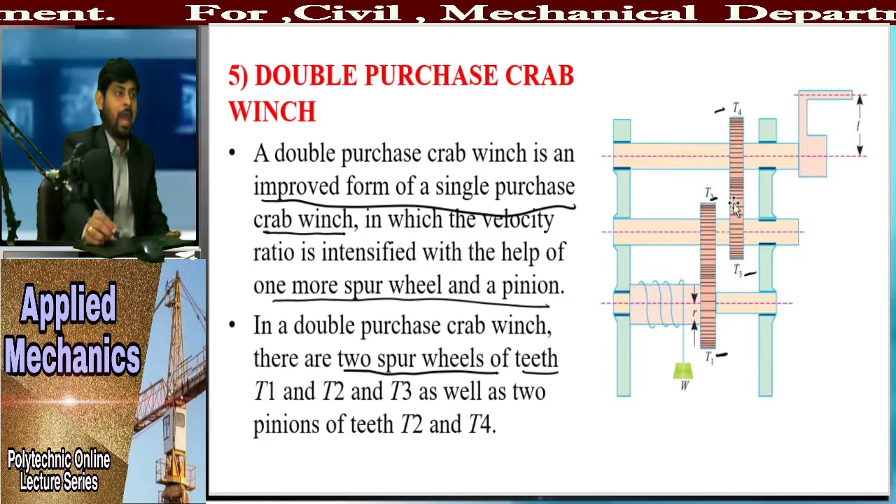In a double purchase crab winch there are 2 spur wheels of teeth T1 and T3, and 2 pinions of teeth T2 and T4. So you can see here we have 2 spur wheels. T1 means this is T1, and T2, T3 as well as T4. The arrangement of spur wheels and pinions is such that the spur wheel with T1 gears with the pinion of teeth T2. So here T1 is your spur wheel gear, but T2 is the pinion. Similarly, T3 is the spur wheel and T4 is the pinion.

So from here to here this is your spur wheel, that is T1, and this connects to the pinion T2. This is your second gear, the pinion gear. Which gear is large in size? That is our spur wheel, and the small one is the pinion. So T1 is greater than T2. T2 is your pinion and T1 is the spur gear. As well, this T3 from here to this clutch is your spur wheel, and T4 is your pinion, which is attached to T3.

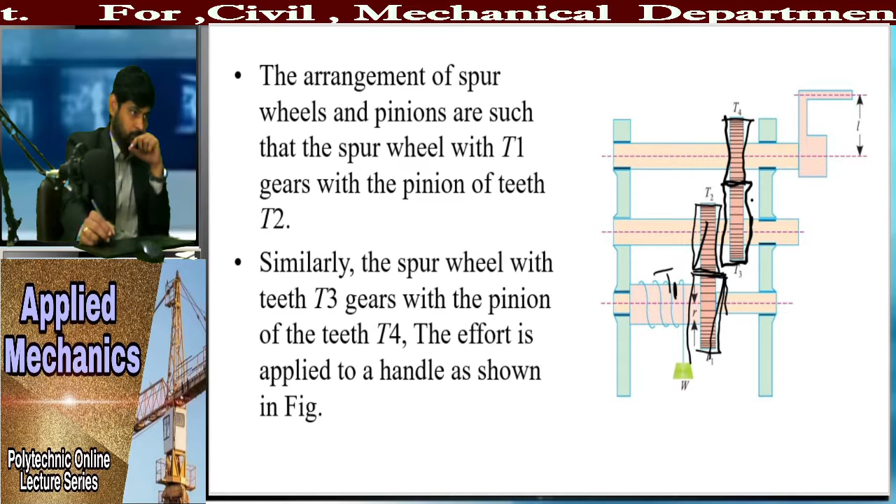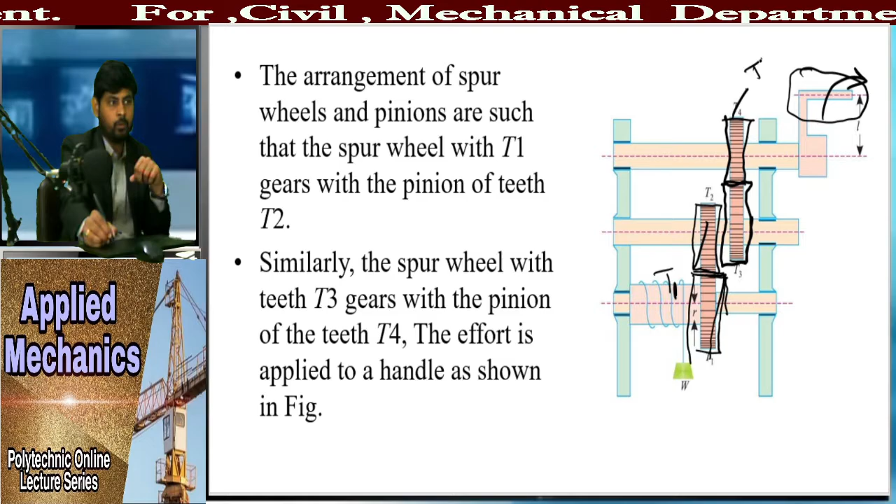So now you can see here T3 gears with the pinion T4. The effort is applied to the handle as shown in the figure. This is the handle, and we apply the effort here to rotate it. When we rotate this handle, T4 will rotate. T4 is mounted on the shaft with T3, so T3 also rotates. When T3 rotates, T2 is automatically rotated, and T2 is mounted on the shaft with T1. That's why T1 also rotates. When T1 rotates, the weight is lifted upward. Okay.

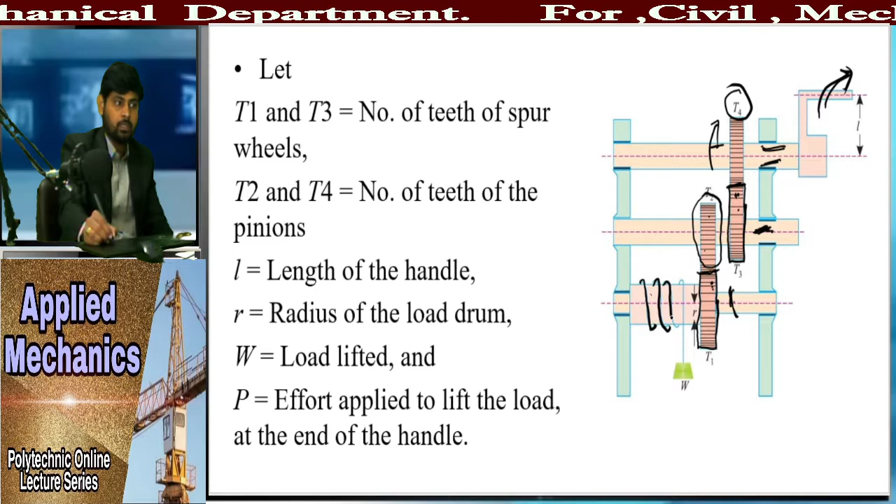Double purchase crab winch. So now see all the notations of double purchase crab winch, which are useful to solve the problems based on this. Now see here, let T1 and T3, this is the T1 and this is the T3. So these are nothing but the number of teeth of spur wheels. So this T1 and T3 is nothing but the number of teeth of spur wheels. So how many number of teeth on this spur wheel? That is nothing but the T1 and T3.

Now you can see here, number of teeth of spur wheels. After that, T2 and T4 are nothing but the number of teeth of pinion. So how many teeth on the pinion wheel? That is nothing but the T2 and T4. Now see here, L is nothing but the length of the handle. So from this shaft, how much is the length of this handle? That is nothing but the L.

Now R is nothing but the radius of the load drum. So here we have a drum. On that drum we have mounted a string, and that string is attached to the load on one end, right? So this much is the radius of this load drum. Or you can say this total is nothing but the diameter, so half of this diameter is nothing but the radius.

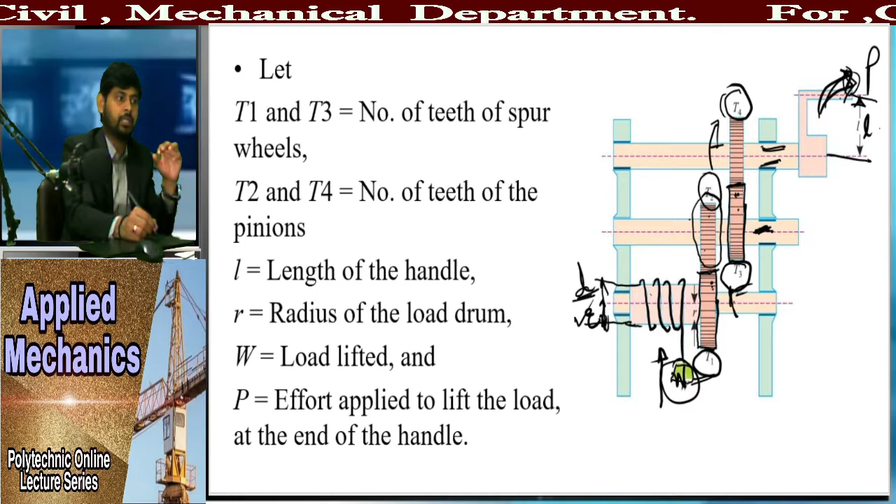After that, W is nothing but the load lifted, and P is equal to effort applied to lift the load at the end of the handle. So here at this end, what effort we have applied, that is nothing but the P. So these are the terms which are used in a double purchase crab winch. Now see the relation of this double purchase crab winch, which we use to solve the problems based on it.

So you can see here, we know the distance moved by effort in one revolution of the handle. One revolution of handle means we are rotating this handle one time. So how much distance will be covered due to that effort? That is nothing but 2 pi L, the total circumference, where L is the distance. So this is your equation number 1.

After that you can see here, the number of revolutions made by the pinion 4. So here by the pinion 4, the number of revolutions is nothing but one revolution.

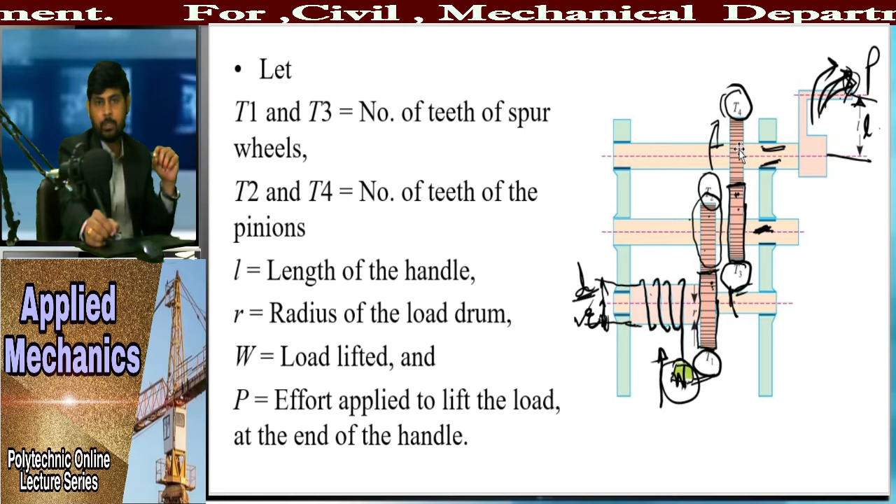Now you can see here the number of revolutions made by the wheel 3. So here you can see how many revolutions occur with wheel 3. T3 is based on T4, right. So T4 divided by T3 is nothing but your number of revolutions of the wheel.

After that, the number of revolutions made by the pinion 2. Pinion 2 is also mounted on the same shaft. See here, wheel T3 and pinion T2 are both mounted on the same shaft. So what revolution we get for wheel 3 is similar for pinion 2, because both these gears are mounted on the same shaft. So that is nothing but T4 by T3, which is similar to the wheel 3.

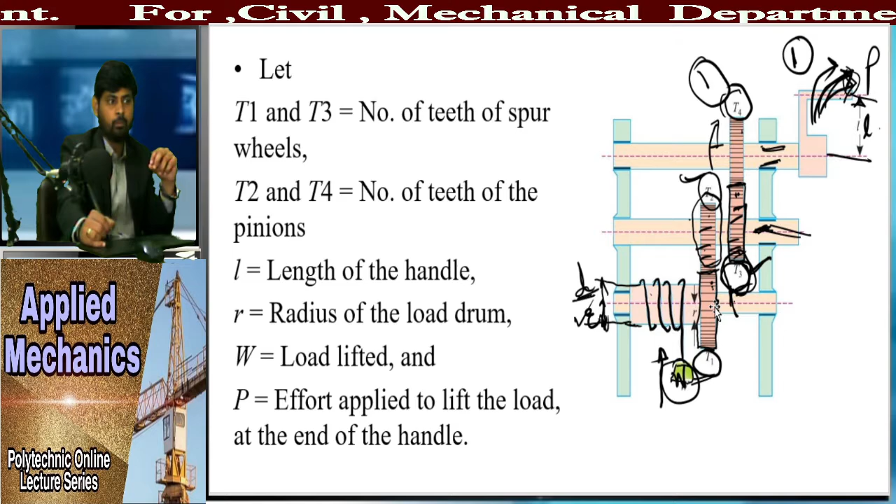Now, the number of revolutions made by the wheel 1. For wheel 3 we get these two. Now for wheel 1 we have to take these two, and also these two. Why? Because we are applying the effort here. So these two into these two, that is nothing but T4 divided by T3 into T2 divided by T1, that is T2 divided by T1 multiplied by T4 divided by T3.

Therefore the distance moved by the load is nothing but 2 pi r multiplied by T2 by T1 multiplied by T4 by T3. So give this equation number 2.

Now we know very well what the formula for velocity ratio is, which we always take: distance moved by effort divided by distance moved by the load. So here distance moved by effort and here distance moved by load.

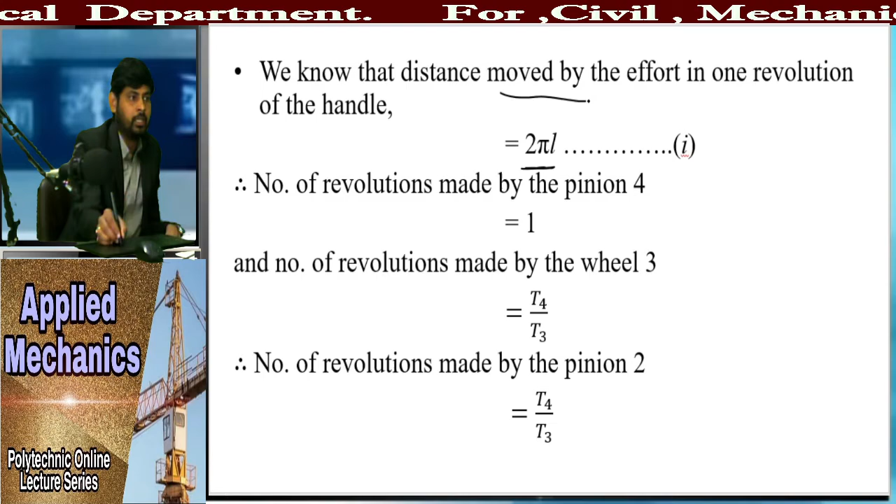In equation number 1, we have calculated the distance moved by the effort, that is 2 pi L. Now the distance moved by the load is, from our equation, 2 pi r into T2 by T1 into T4 by T3.

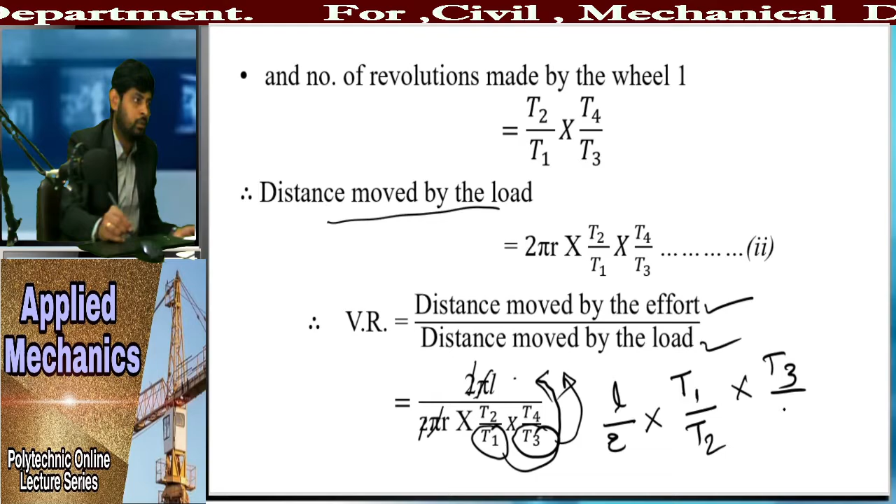Now these two pi will get cancelled. So you get the equation L by r multiplied by T2, which is in the denominator so it shifts to the numerator, giving T1 by T2. Similarly T4 is in the denominator, so it shifts to the numerator giving T3 by T4. So the new equation is L by R multiplied by T1 by T2 multiplied by T3 by T4. This is nothing but the velocity ratio for the double purchase crab winch.

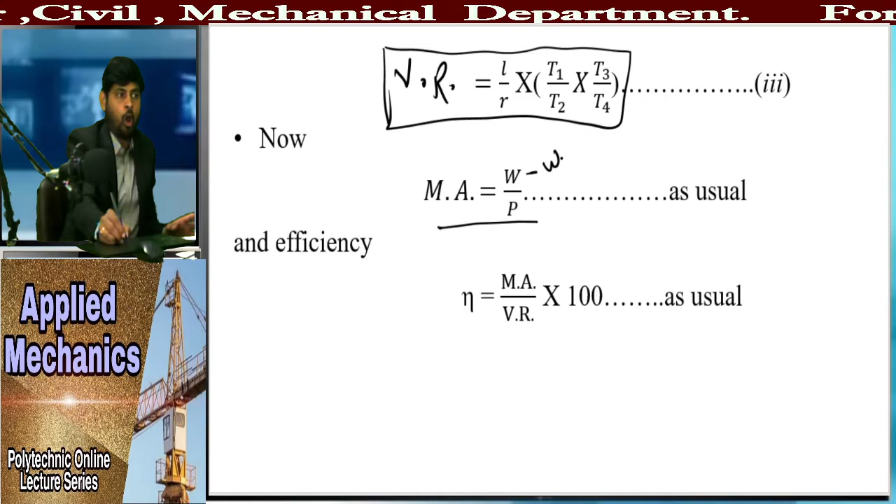So this is what we have to find out. Now mechanical advantage, as usual, is the weight or load divided by the effort. And similarly, efficiency is mechanical advantage by velocity ratio into 100, as usual.

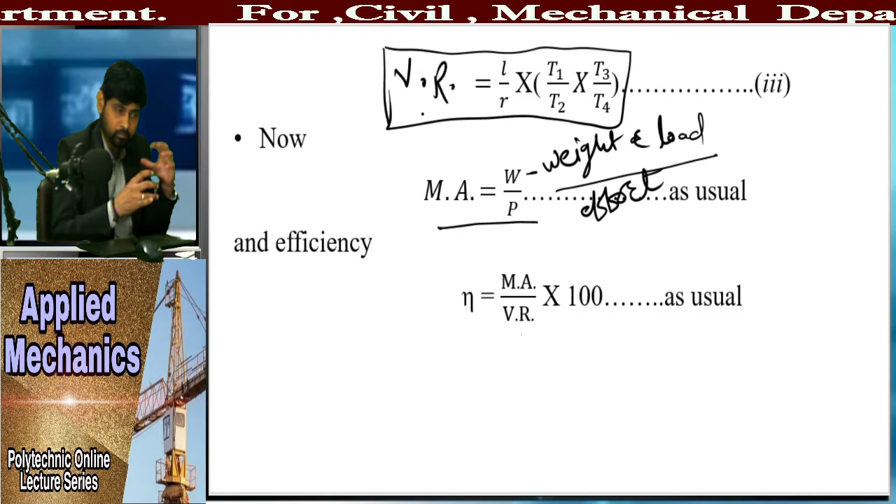So in MCQs they can ask a question like: what is the velocity ratio of single purchase crab winch? And they will give you all the velocity ratios, for differential, for single crab, for double purchase crab winch, and for differential. So four options are given to you, and you have to select the appropriate option as the answer.

When you are not able to select the appropriate answer, meaning you don't remember the formula of velocity ratio for a particular machine, your answer will be wrong. If they are asking for the single purchase crab winch and you select the answer for the double purchase crab winch formula, your answer will be wrong. That's why you have to remember the velocity ratio equations for the different machines.

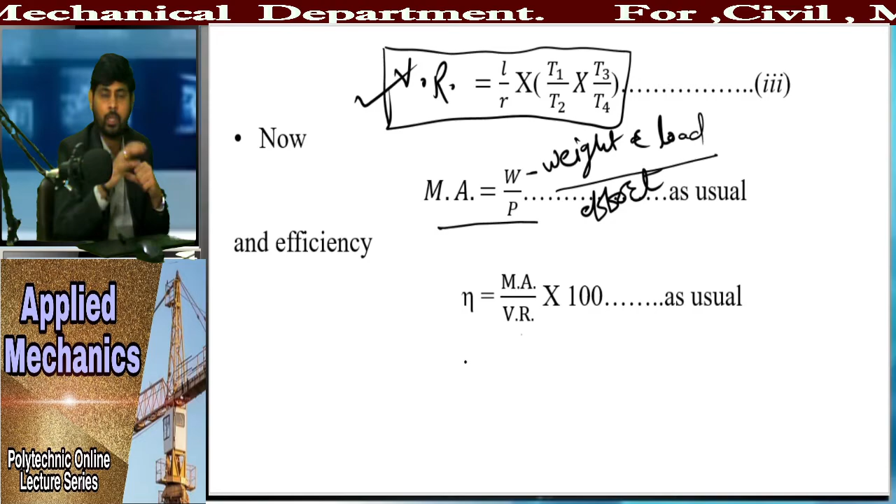Before going to sleep you have to read that formula at least once, and after waking up in the morning, just when you wake up, you have to read that again once. If you keep doing this daily, you will remember those formulas for your lifetime, meaning you will never forget them. So that will be helpful to you in your interviews also.

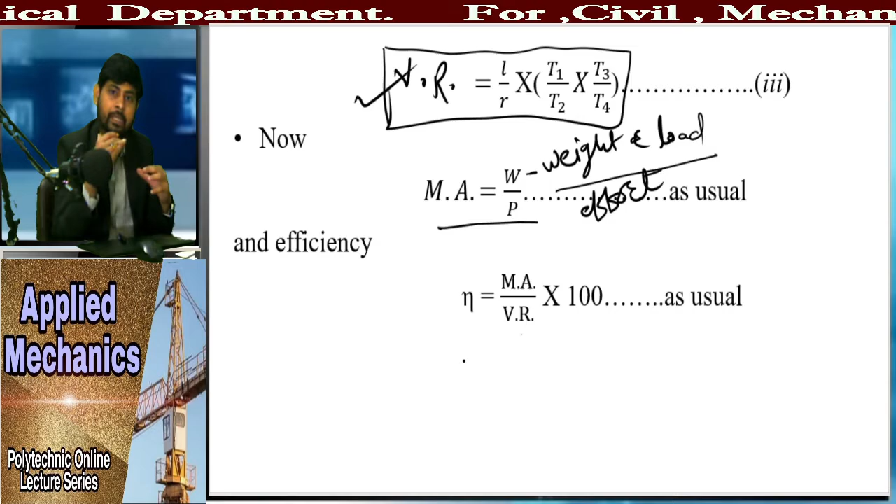As I always told you, this subject is the most difficult subject in this semester, and it is also foundational for mechanical and civil students. Once you understand the concept of mechanics, you will easily solve the problems in strength of material, theory of machine, machine design, and after that theory of structure or design of structure. So these subjects will be much easier for you.

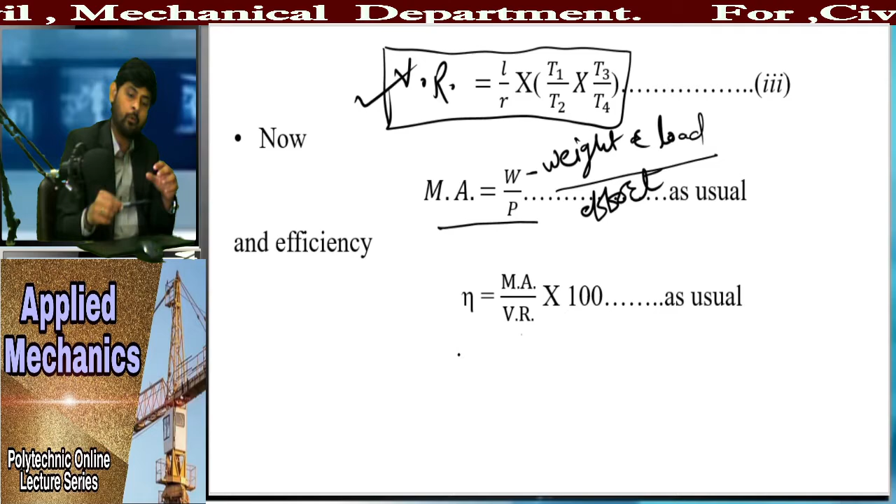That's why you should know the basic knowledge of applied mechanics. Like for mechanics, you should have a basic knowledge of applied mathematics and physics also.

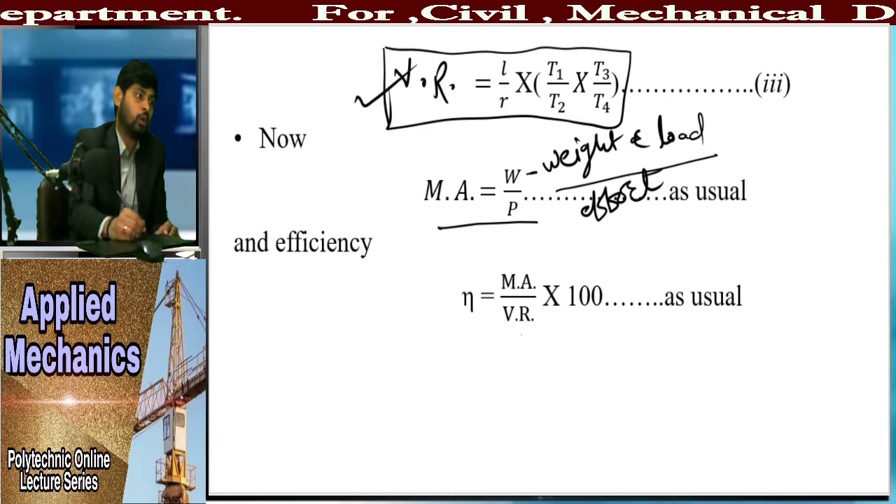So now, once we have seen the double purchase crab winch derivation, we get the formula for velocity ratio here. Now we have to find out the problems and solve a problem based on it. So just see here example number 10, based on our sequence 1 2 3 4 5 6 machines, which is based on the double purchase crab winch. As I always told you, read the problem carefully. So what it says is, in double purchase crab winch.

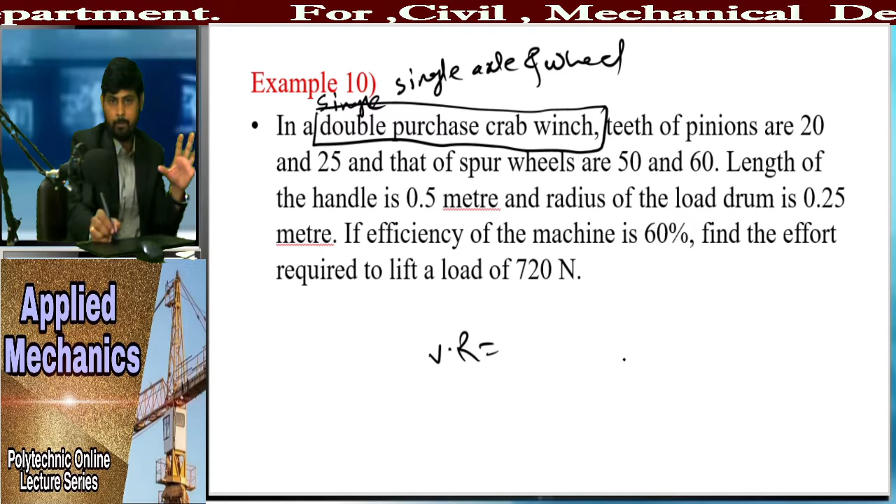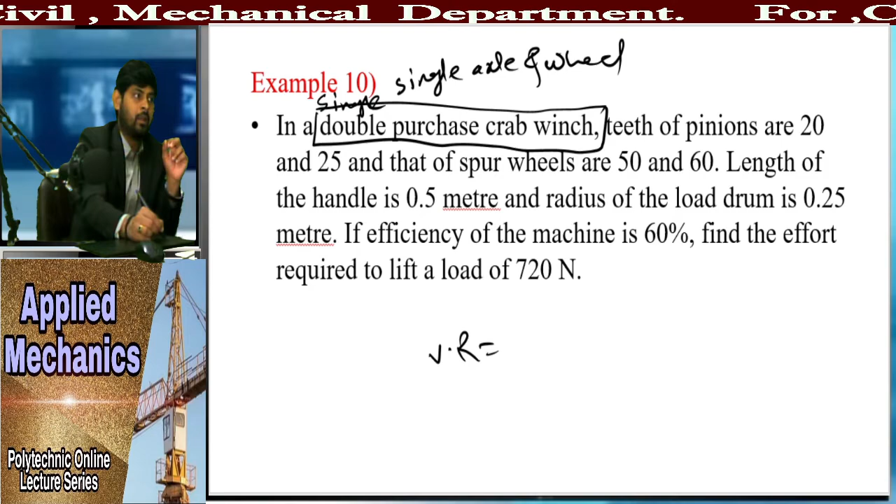So you have to practice well, you'll have to practice very well for this. That's why I told you to prepare one notebook for the formulas.

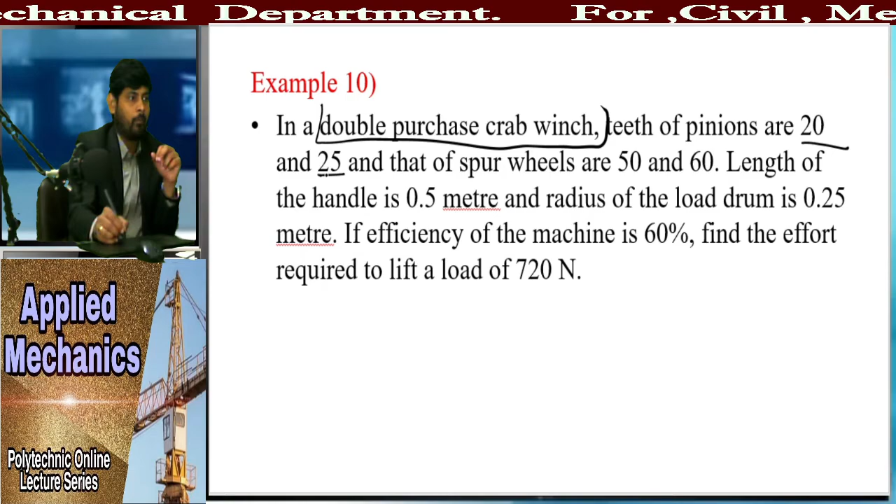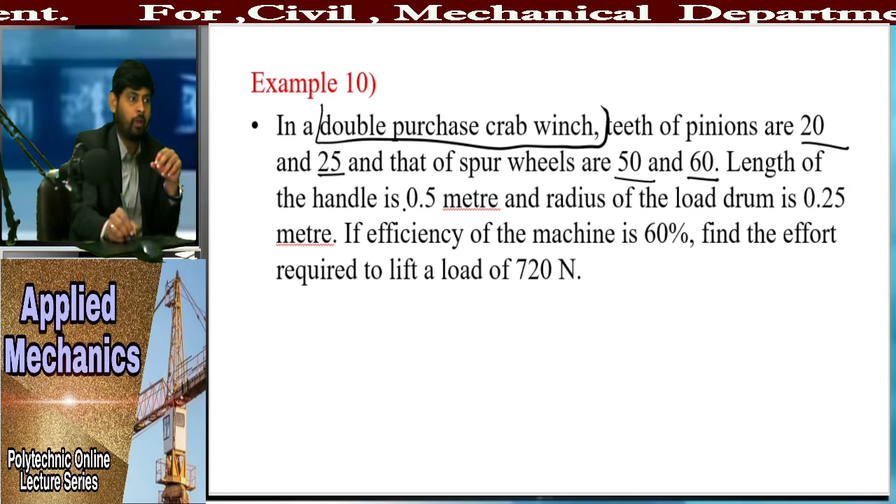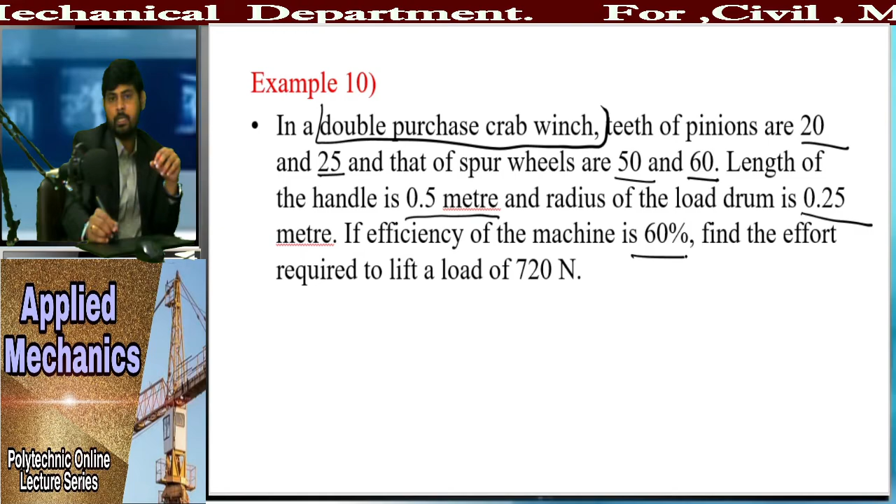Now see here what our problem says. In a double purchase crab winch, teeth of pinions are 20 and 25, and that of the spur wheels are 50 and 60. We know the value of T1, T2, T3 and T4. Length of handle is given as 0.5 meter, and radius of load drum is also given as 0.25 meter. Now, if the efficiency of machine is given as 60%, find the effort required to lift the load. Load is given as 720, and effort is what is asked.

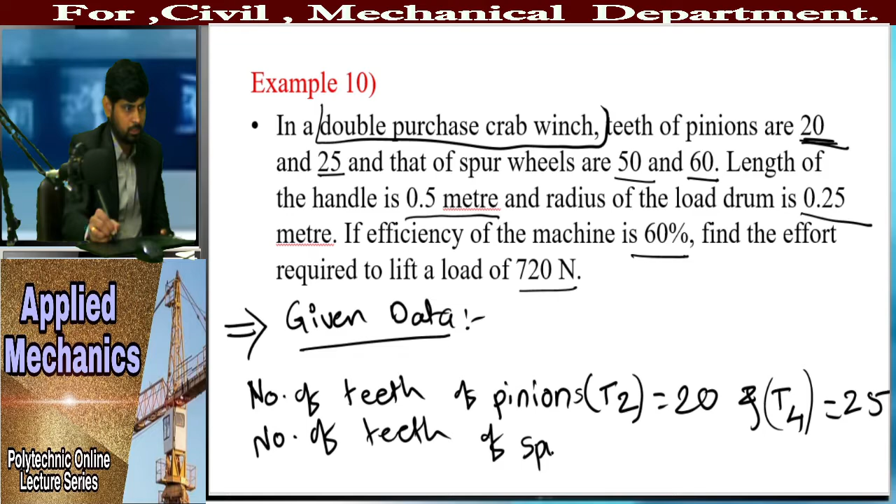Now see, that of the spur wheels means number of teeth of spur wheels. So here T1 is equal to 50 and T3 is equal to 60.

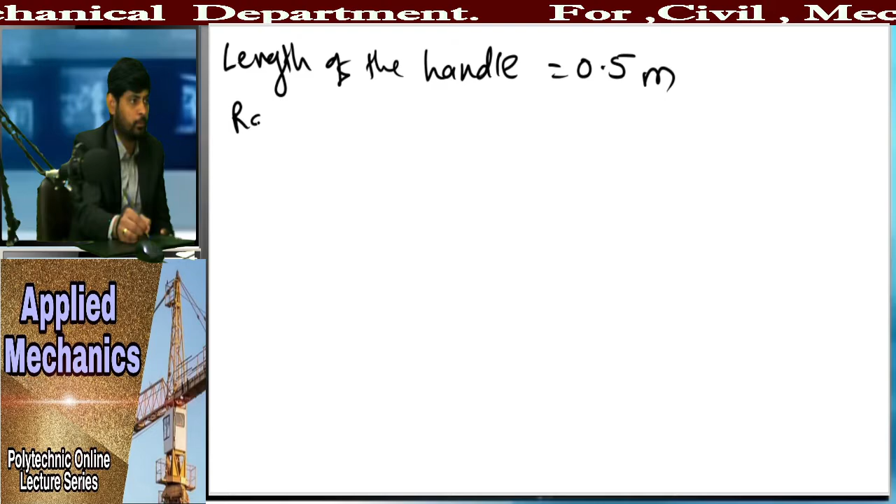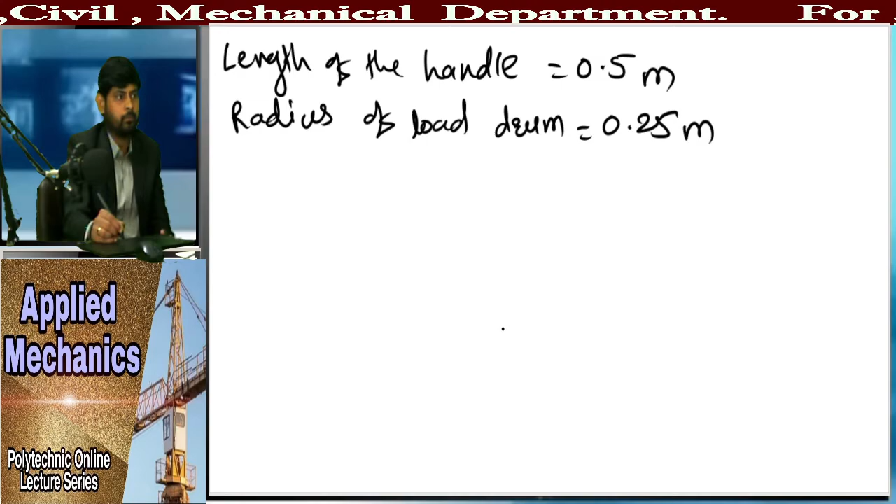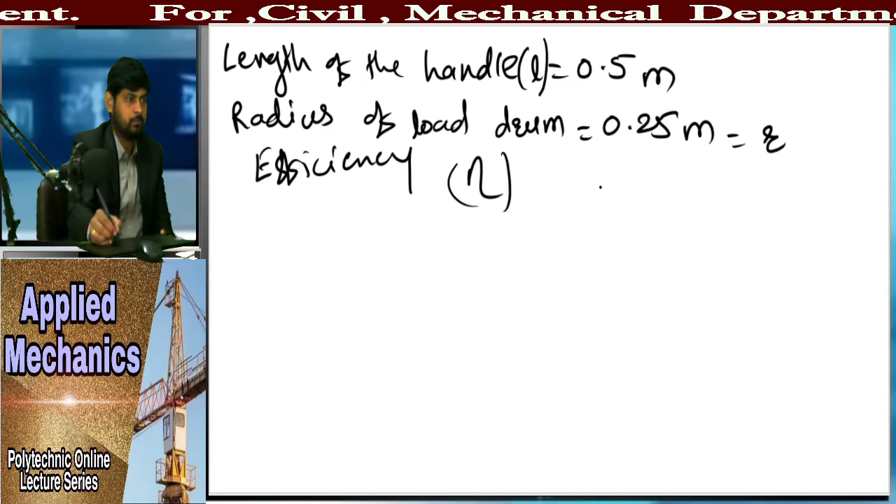Now see what we have given, efficiency. Efficiency is also given to us. Radius of load drum we have notated as small r and this is nothing but L. Efficiency is given to us, that is 60%. So write down here, efficiency is 60%.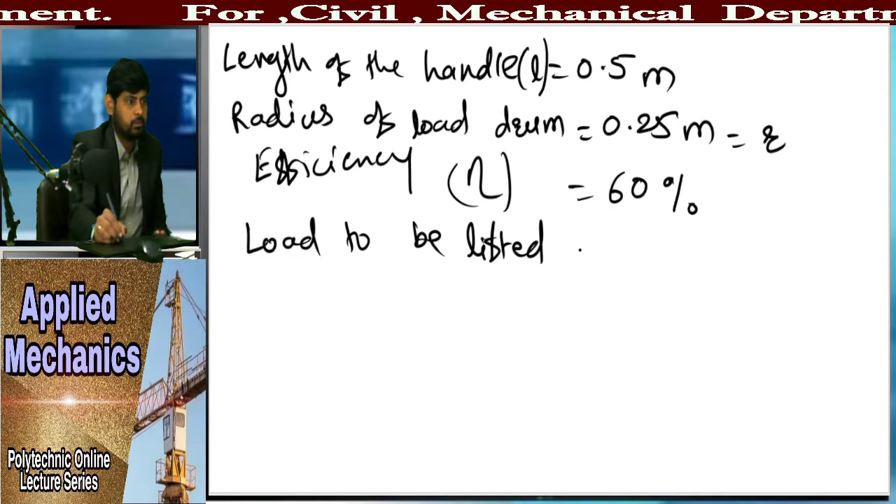After that what is given, we have given the load to be lifted, that is nothing but W, how much, it is 720 Newton, right. So this is all the given data, and what do they ask us, they ask effort required to lift load, that is nothing but P. How much, P is how much?

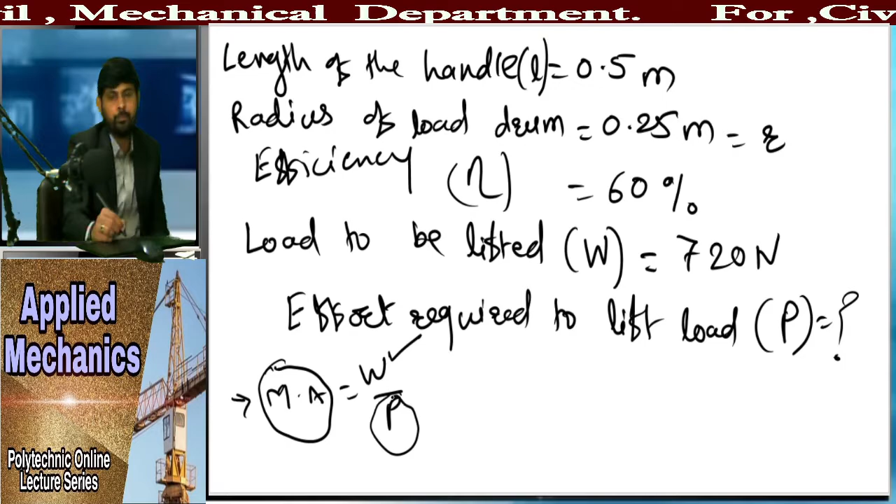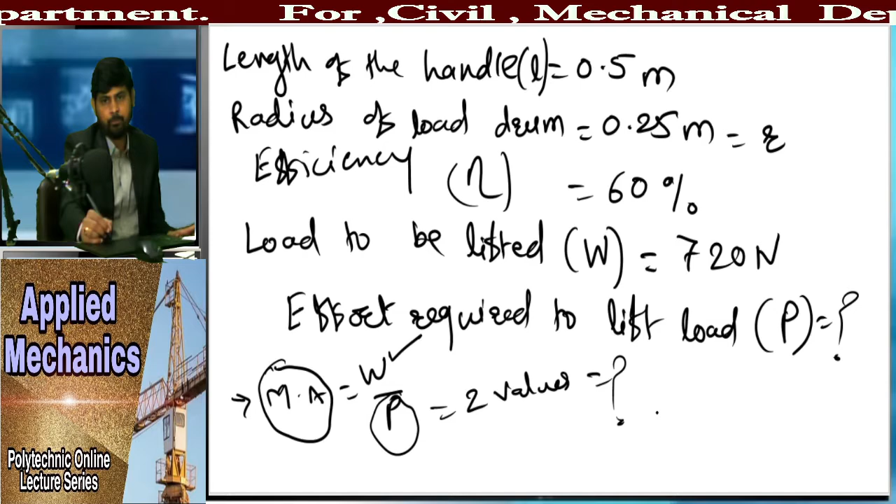But now you can see here, we don't know the value of mechanical advantage. We know the value of load, but we don't know the value of effort also. So here two values are unknown. So where two values are unknown, can we find out from there? Obviously not, right.

So one thing is not usable to us. Now, it is usable to us, but let's see when. Second thing, how we can find out. Now then we can find out by using this equation. Which equation?

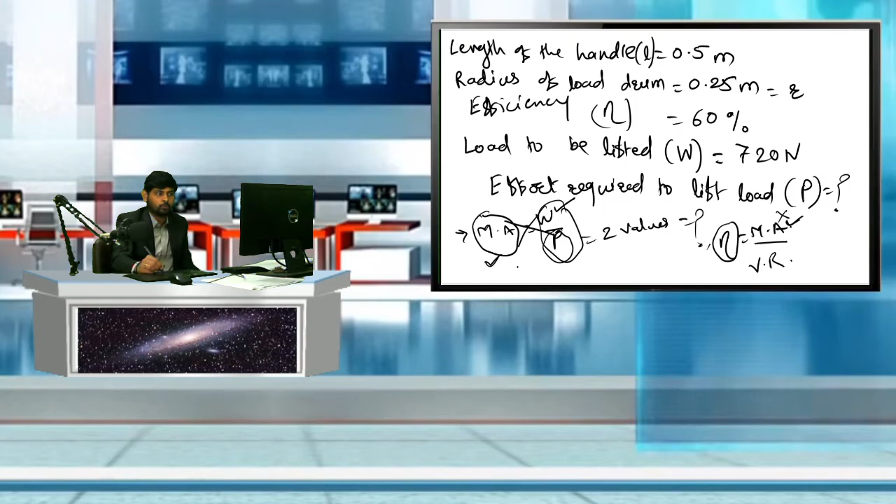Efficiency is equal to mechanical advantage divided by velocity ratio. We know efficiency, but not mechanical advantage directly - though we can find it using a formula. We also know the formula for velocity ratio, which we recently covered for the double purchase crab winch.

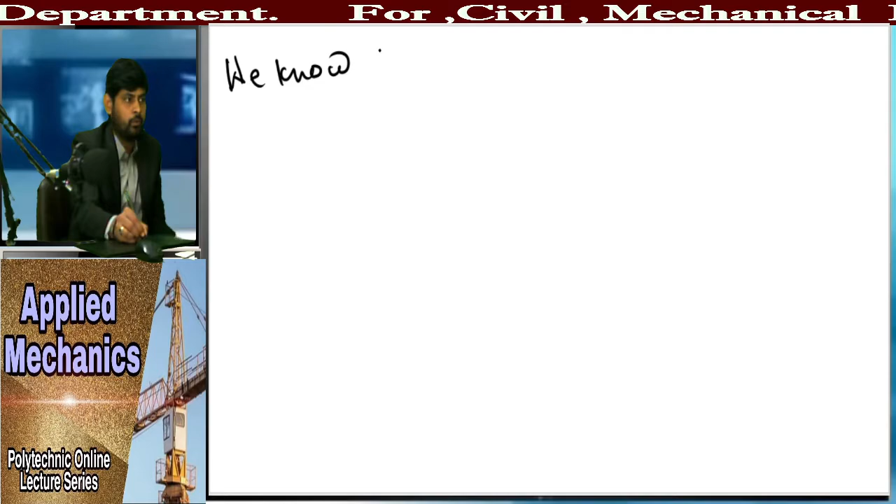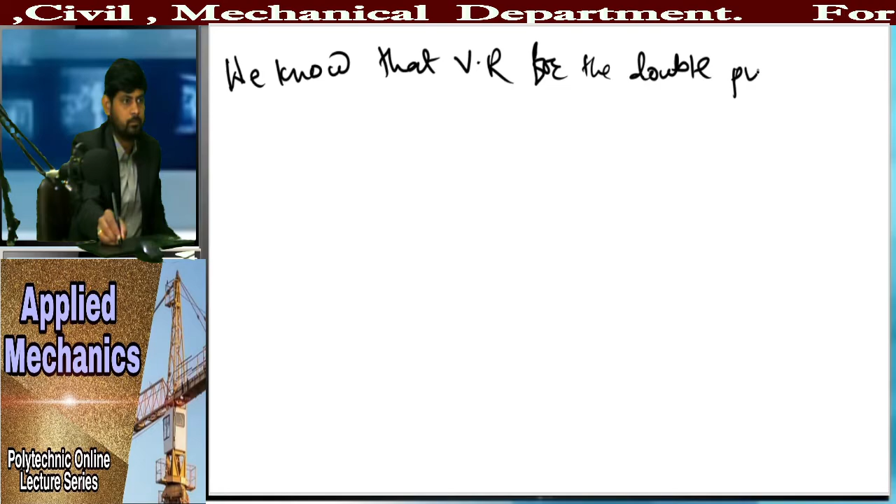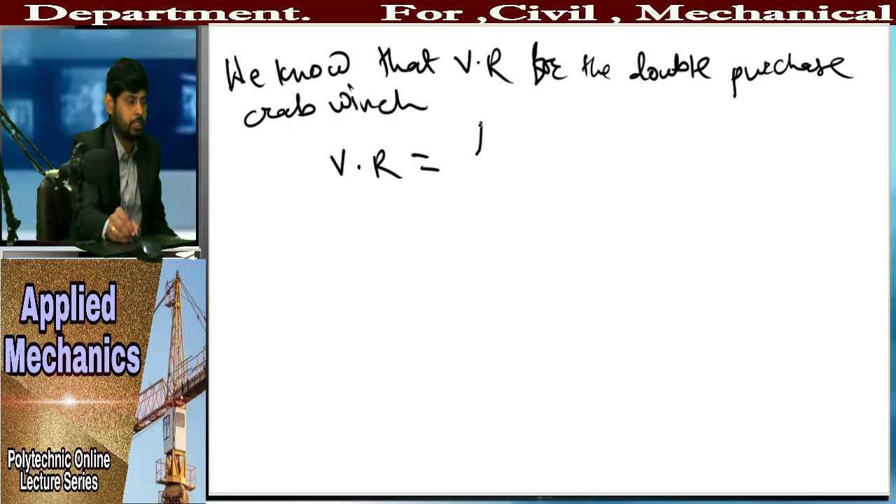The first thing we have to do is find out the velocity ratio. We know that velocity ratio for the double purchase crab winch is nothing but L by R into T1 by T2 into T3 by T4. So this is the formula for velocity ratio.

Now we know the value of L, R, T1, T3, T2, T4. So put these values and find out the velocity ratio. The value of L is 0.5, R is 0.25, multiplied by value of T1 which is 50 divided by T2 which is 20, into value of T3 which is 60 and value of T4 which is 25.

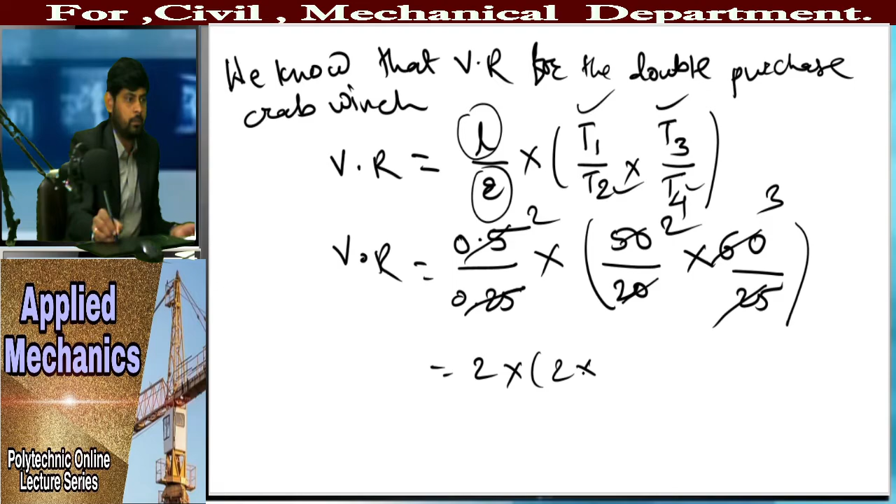Here T3 is 60 and T4 is 25... okay, and 0.25, 2 are right. So here you will get 2 multiplied by 2 multiplied by 3. So 3 twos are 6, and 6 multiplied by 2 is 12. So this is your velocity ratio - velocity ratio is equal to 12.

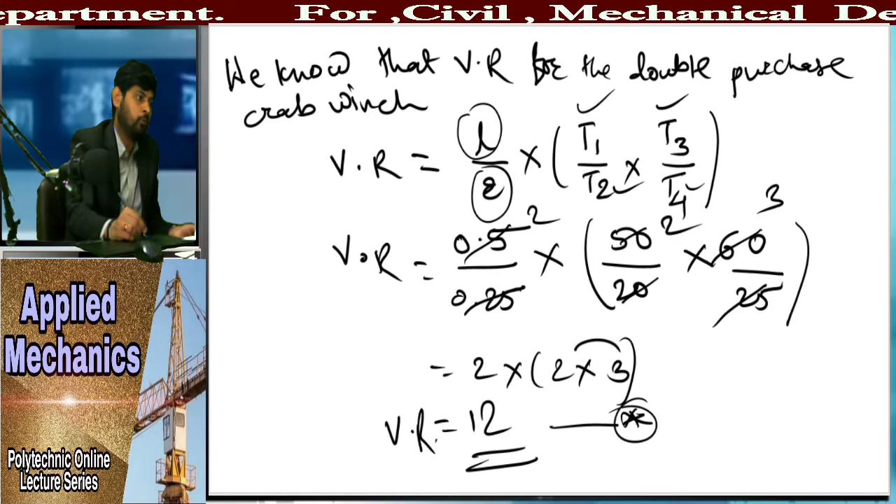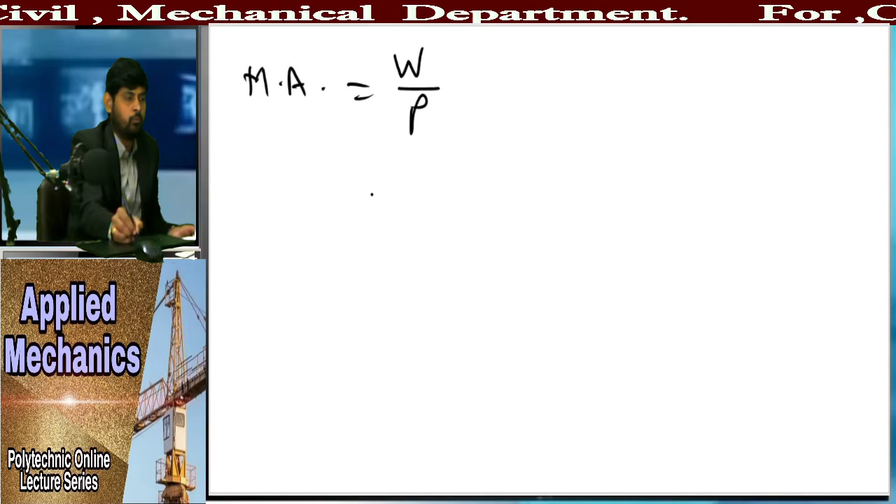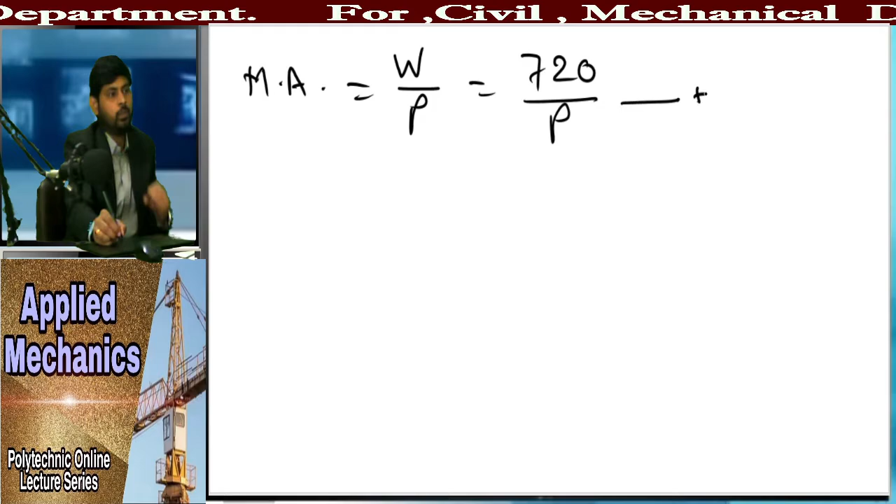Once you get the value of velocity ratio, the second thing you have to do is find out the mechanical advantage. The formula for mechanical advantage is W upon P. So value of W is 720 divided by P. This is the second term we have to find out.

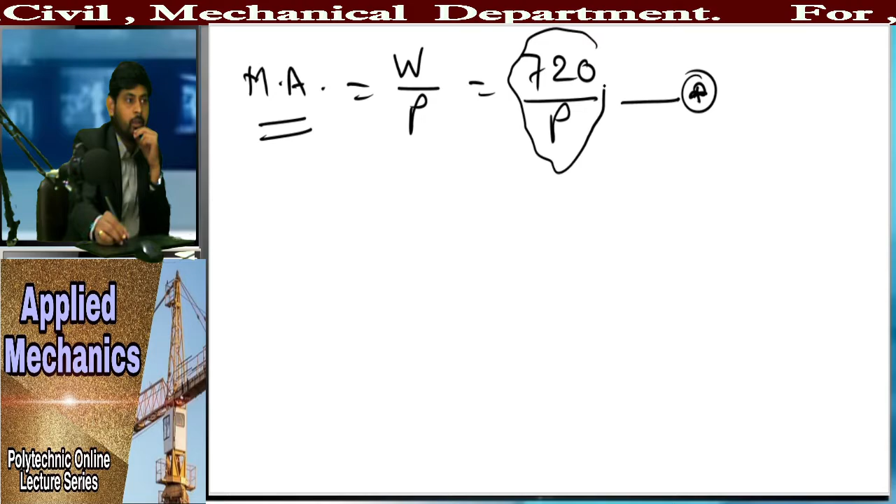So now we get the value of mechanical advantage in terms of this equation. Now, we know the efficiency. So what is the formula for efficiency? That is nothing but mechanical advantage divided by velocity ratio into 100.

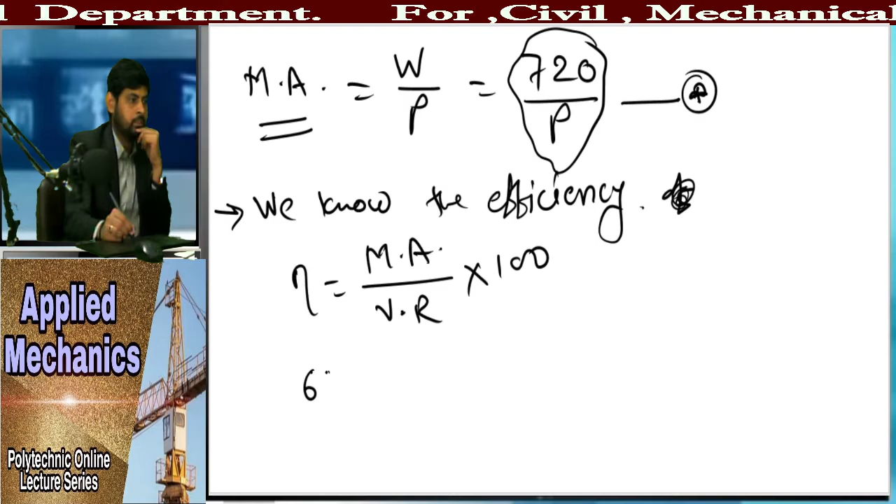Efficiency is given to us as 60%, equal to mechanical advantage. We get this equation. So put that value here: 720 divided by P, divided by velocity ratio, which we found to be 12, multiplied by 100.

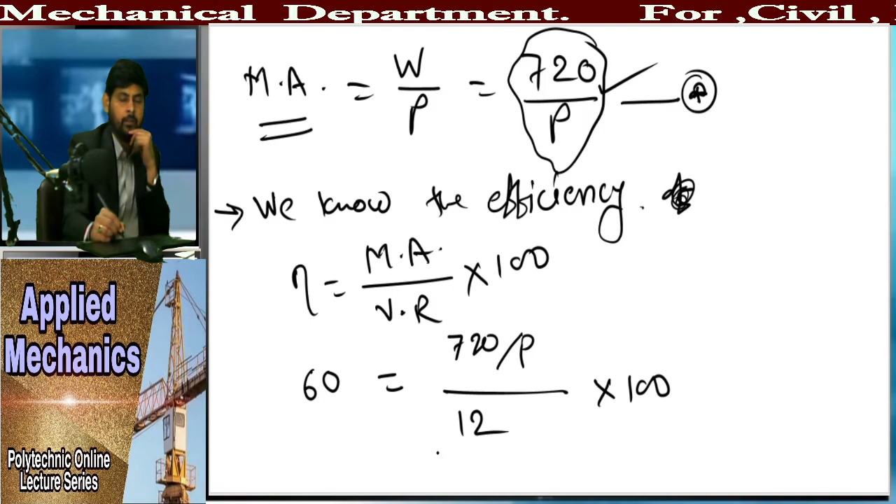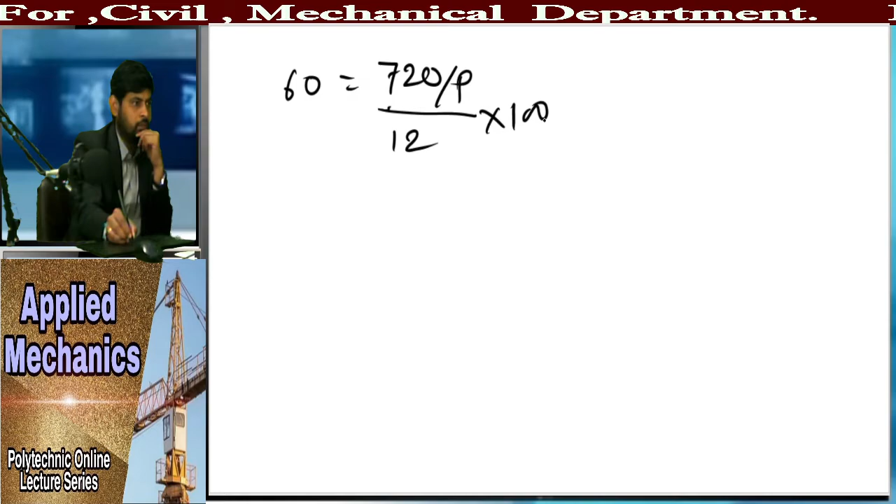So now do this calculation. Here you can see 60 is equal to 720 divided by P divided by 12 into 100. Now this 100 we can shift here, it will go in the denominator. So 60 divided by 100 is equal to, this P is already in the denominator, so we can shift here, that is 720 divided by 12P.

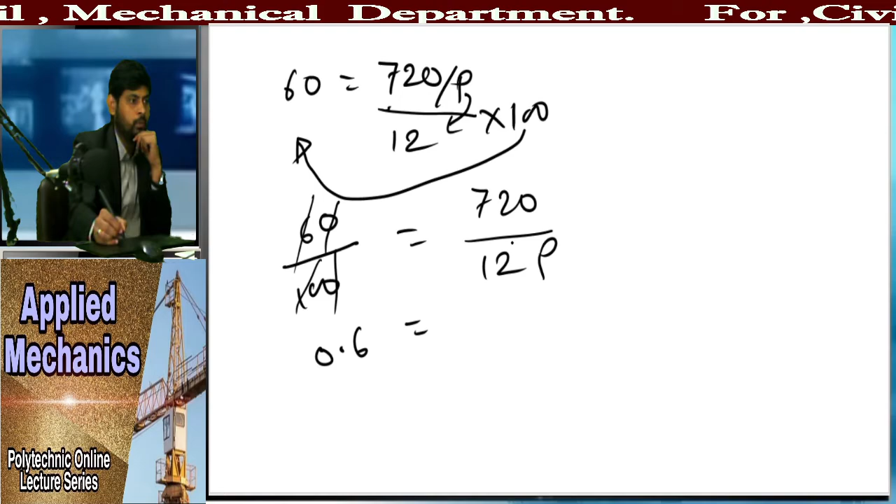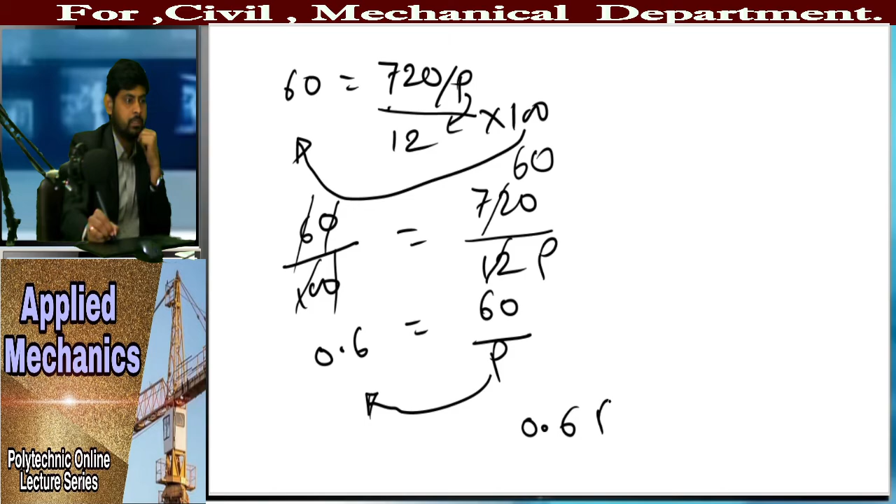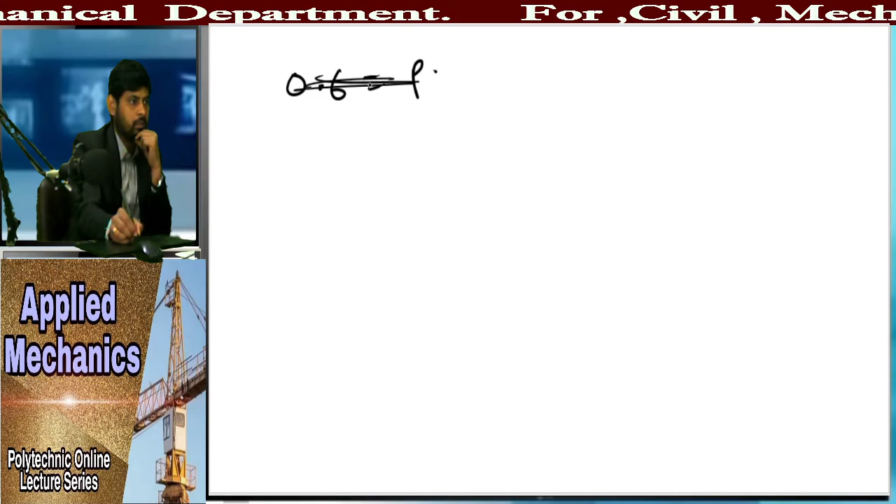So the zeros get cancelled, and 6 by 10 means it is 0.6 equal to - here 12 sixes are 72, and this zero as it is, so this value will be 60 divided by P. Now this P will shift towards the left side, so you get the equation: 0.6P is equal to 60.

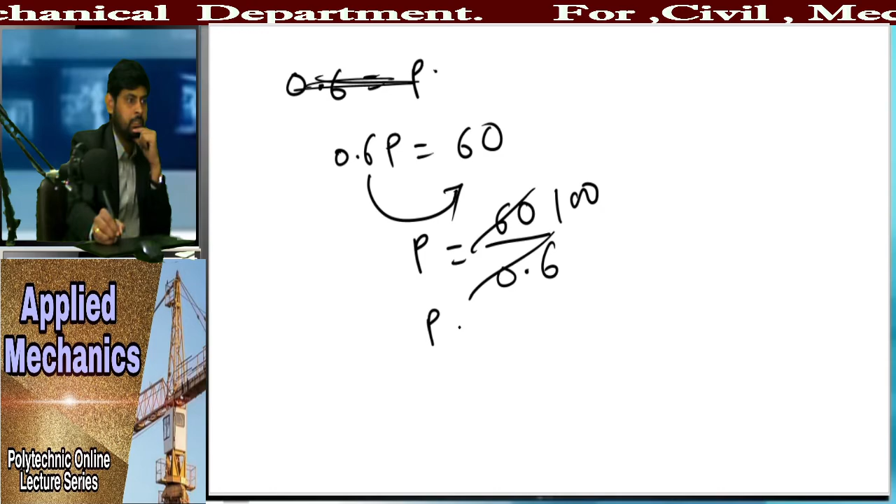Now this 0.6 shifts towards the right side, so you can write the equation like this: P is equal to 60 divided by 0.6. Do the calculation in your calc sheet, then it will be 100. So you get the value of P is equal to 100 Newton.

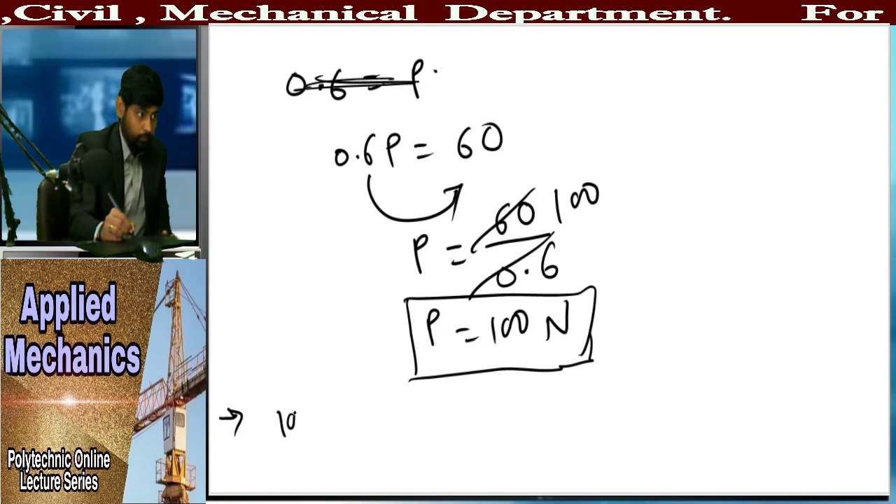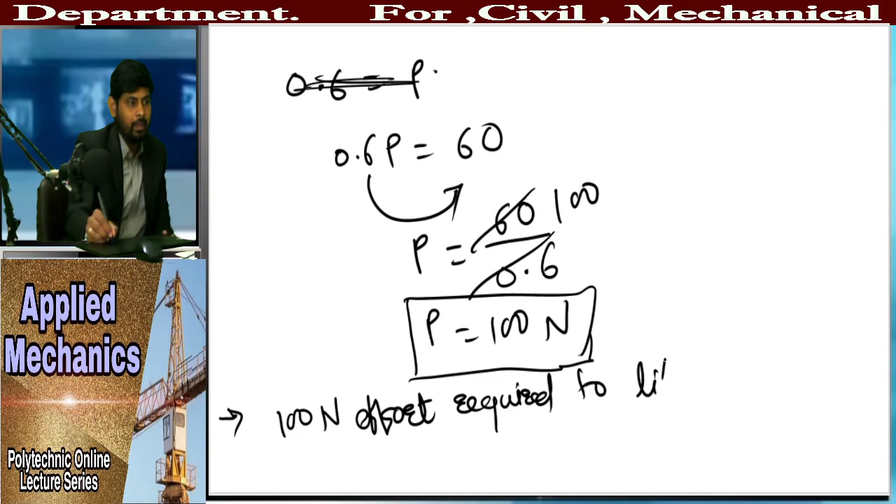So what was asked in our problem? They are asking us about the effort, so we get this effort. So you can write here: 100 Newton effort required to lift the load of 720 Newton, which was given. So this is your answer.

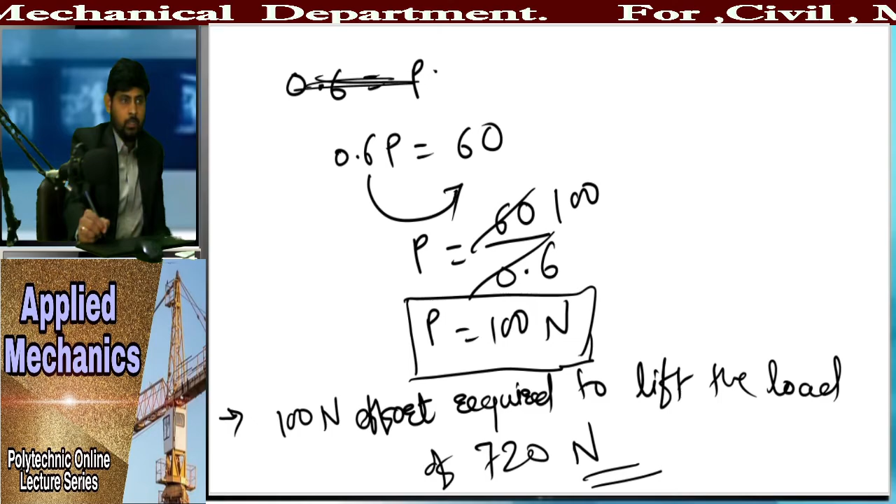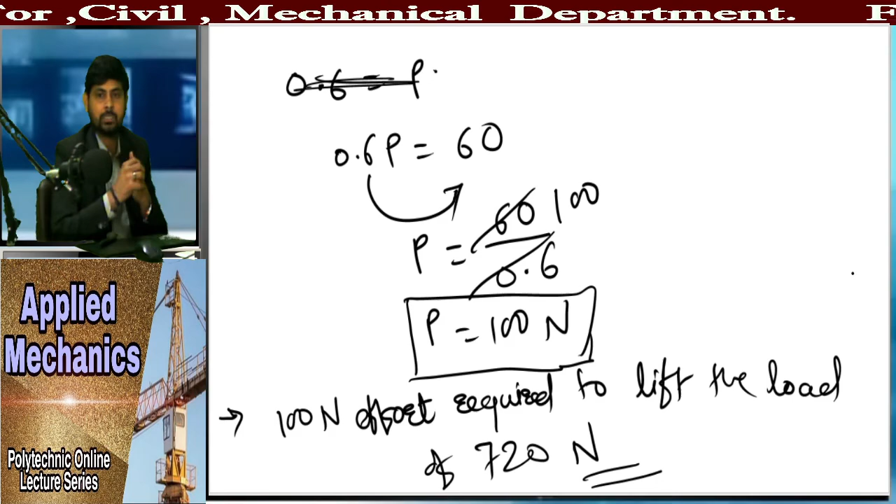So like this you can solve your problem. In today's lecture we discussed the double purchase crab winch and one problem based on it. One small difference between single purchase and double purchase crab winch: in single purchase we have only one spur wheel and one pinion, meaning T1 and T2. But in double purchase we have two pinions and two spur wheels, meaning T1, T2, T3 and T4, four terms.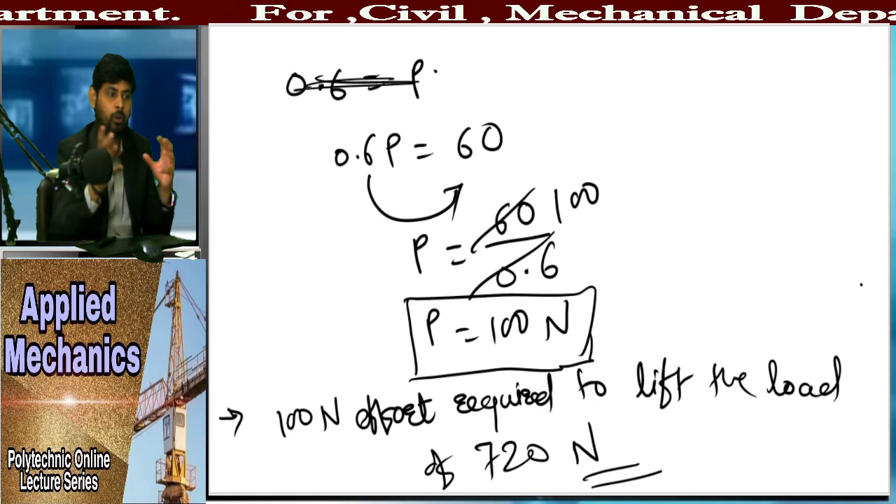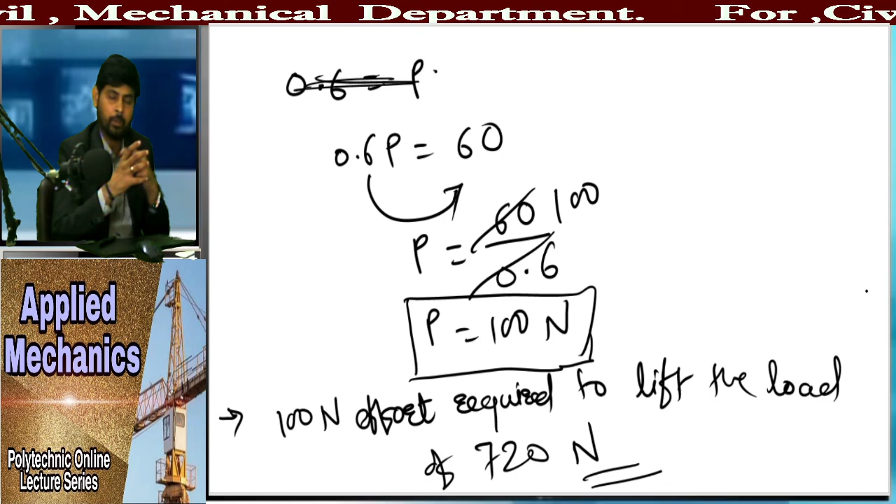By using these equations we can solve problems based on it. In the next lecture we are going to discuss another problem, a little bit different from this one, so you will get an idea how a number of problems can be solved on different double purchase crab winches. Let's meet in the next lecture - you can try similar problems at your home. Thank you.